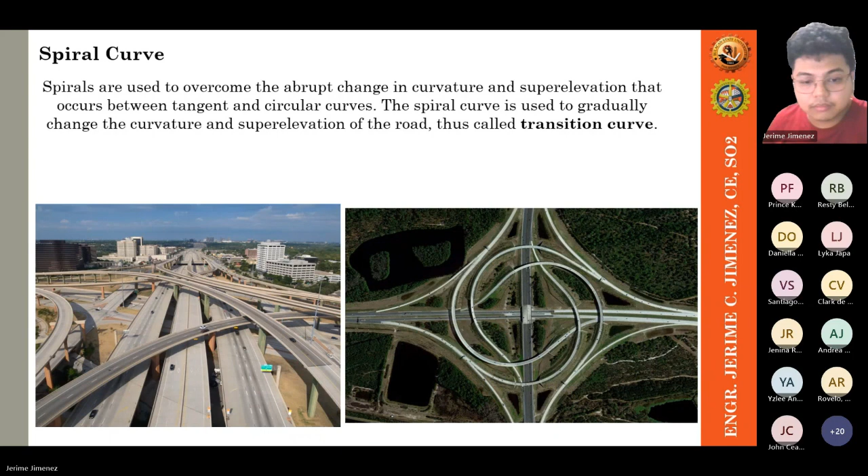Now, for the elements of the spiral curve. So how can we draw or how can we plot— sorry, hindi pala ito reverse curve, element of the spiral curve. So baguhin ko lang. Ayan, wait lang.

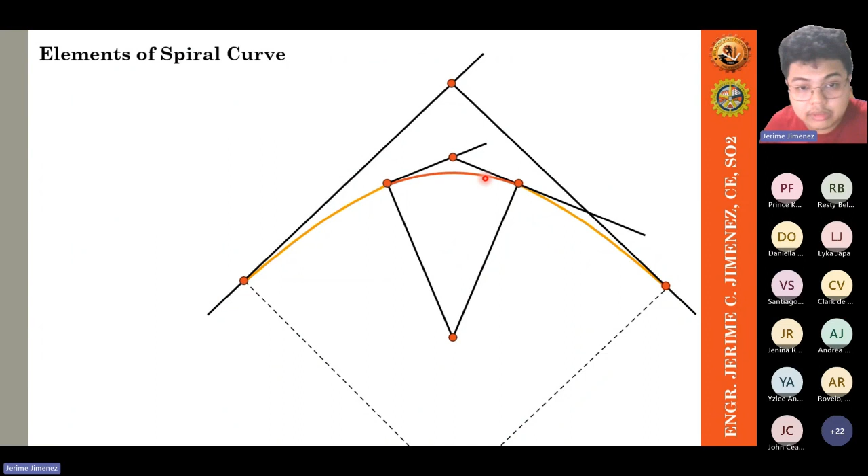So from the spiral curve, we transition to the simple curve. Then from the simple curve, we transition back to the spiral curve. This is now the exit of our highway. This is the start of our highway. I'll just offset this simple curve outward, then offset it also to the right. That will denote the external simple curve, or our external curve.

So this point here should be PC. But since we're dealing with a spiral curve, we call it TS. And this point, that will be our SC. This point is our CS, and this point is our ST. So this point is our point of intersection, or the vertex.

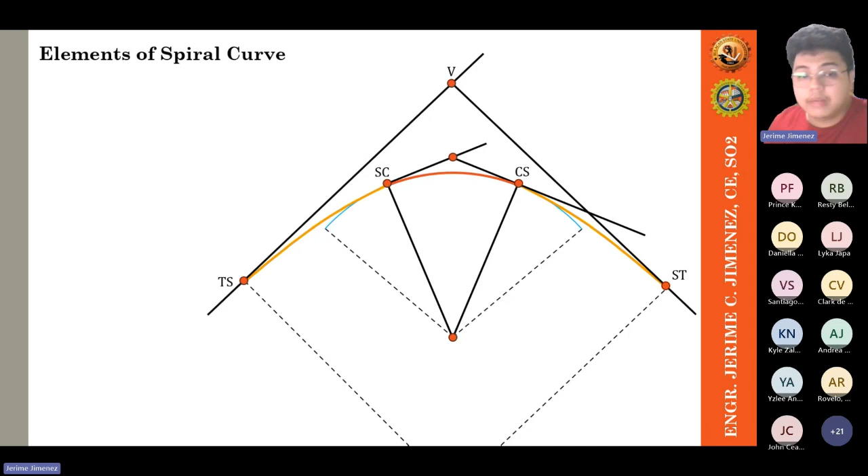So let's define each of these symbols. What is TS? TS is tangent to spiral. SC is spiral to curve. CS is curve to spiral, and ST is spiral to tangent.

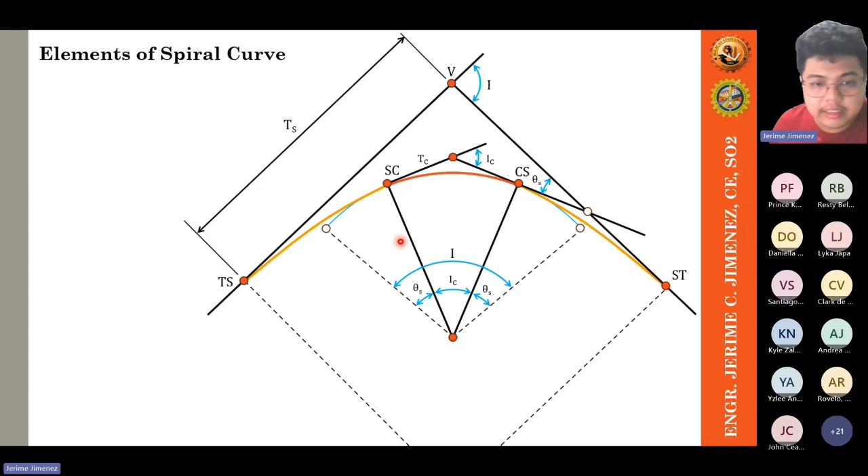So next element natin is, tingin kayo dito sa portion na to. That is our R sub C. And that R sub C is the radius of the simple curve. So that is from SC papunta sa center of the simple curve and from CS papunta sa center ng simple curvature.

Next. Tingin tayo sa portion na to. Ito, yung from CS to the vertex. That portion is our ST. ST denotes the short tangent. And this portion from this vertex, from this intersection papunta sa ST, yan naman yung ating long tangent.

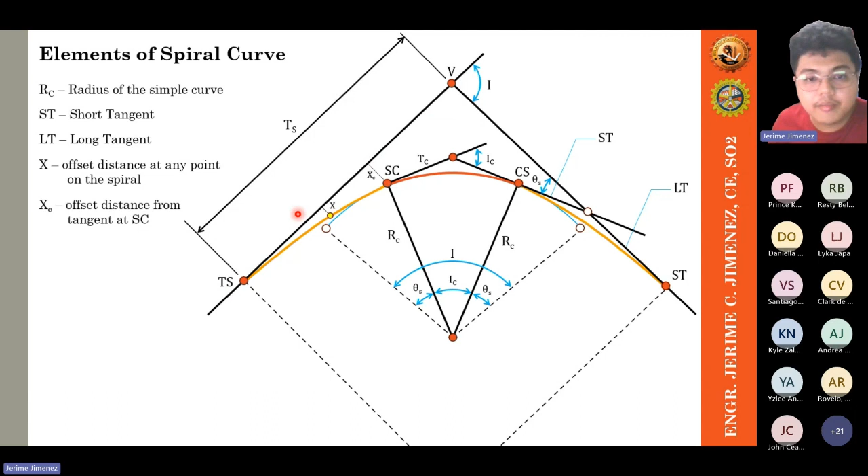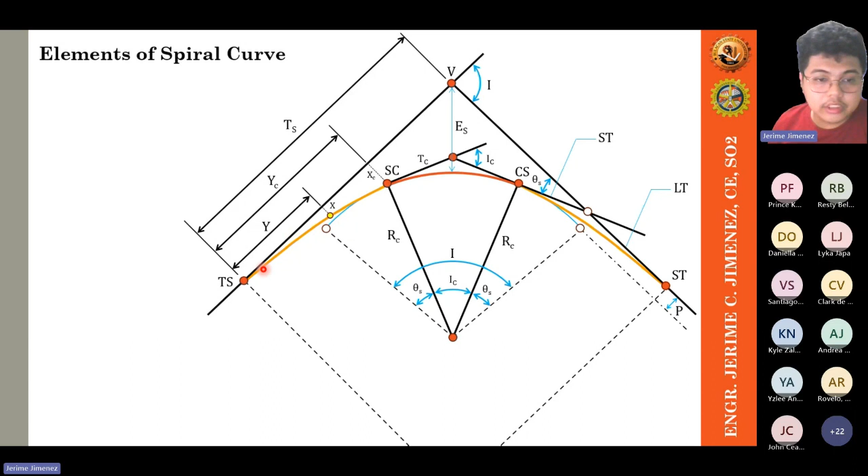So at any point along the spiral curve, may distance yan from TS, okay? Itong distance na yan, and that distance is denoted as L, okay? L. So L is length of spiral from TS to any point along the spiral. Okay, kung dito niyo naman siya kukunin sa kabila, that is length of spiral from ST to any point along the spiral. So this is from TS, okay? So nakita niyo wala siyang subscript. Pag wala pong subscript dito sa ating formula, it denotes that it is pertaining to any point along the spiral. Again, pag sub C, that is the curve or the simple curve. Pag sub S, that is the spiral curve. Pag wala naman siyang subscript, that denotes any point along the spiral curve. Okay? Next, yung distance naman from TS papunta dito sa SC, let's denote it as L sub S. And that L sub S is now the length of the spiral. Okay? Or L sub S.

Okay? So, tingin dito sa simple curve natin. Meron din po tayo dyan tinatawag na subtended angles. Considering the full station of 20 meters, yung subtended angle niya is denoted as D sub C. And that D sub C is degree of the simple curve. Paano siya kino-compute? Alam niyo na yun, simple curve, no?

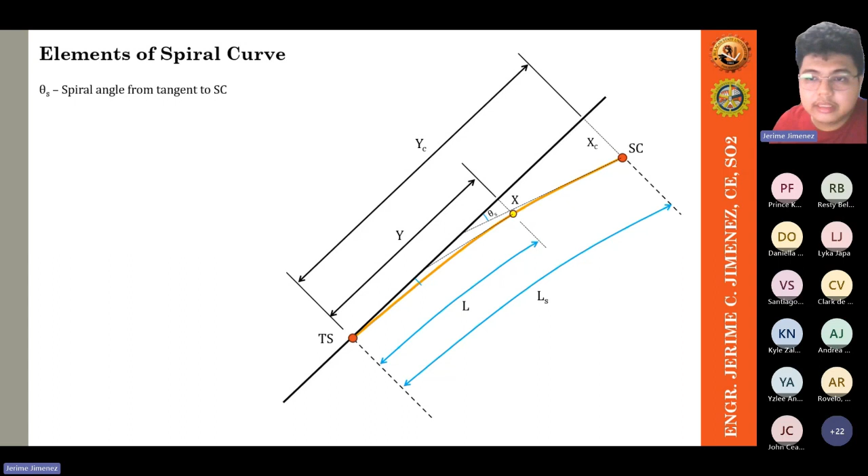At any point on the spiral curve, drawing naman ako ngayon dito ng tangent line. And this tangent line is what we called theta. Ito, theta po yan. And that theta is the spiral angle from tangent to any point on the spiral. So we have theta sub S and we have also theta.

Now, we connect TS to SC by a line. May angle din po yung tangent at saka yung connecting line natin from TS to SC. Ito yon. So what is that angle? Ano yung angle na yun? So, kung tangent line to, we have TS and SC. Kinonektan natin siya. Isipin nyo, PC to, ito ay PT. So therefore, what is this tangent? Anyone?

Parang gusto ko magtawag ah. O dahil nagre-review ka na kanina, sige Vanny, ano yung tawag sa angle na yan? Wala. Okay, mukhang sleeping sila ngayon.

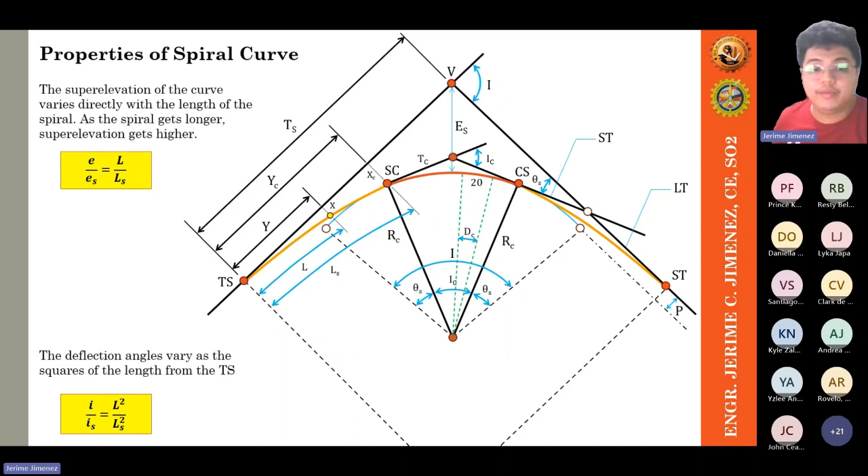So we have now the summary of formulas. So ang nilagay ko dito ay 16, I think this is 16 formulas. So I can derive this one. Pwede ko ipakita yung derivation nito. Pero I'll just post a supplementary video for the derivation of the formula. So ang gusto lang naman natin is yung final output or final formula na gagamitin natin sa ating problems.

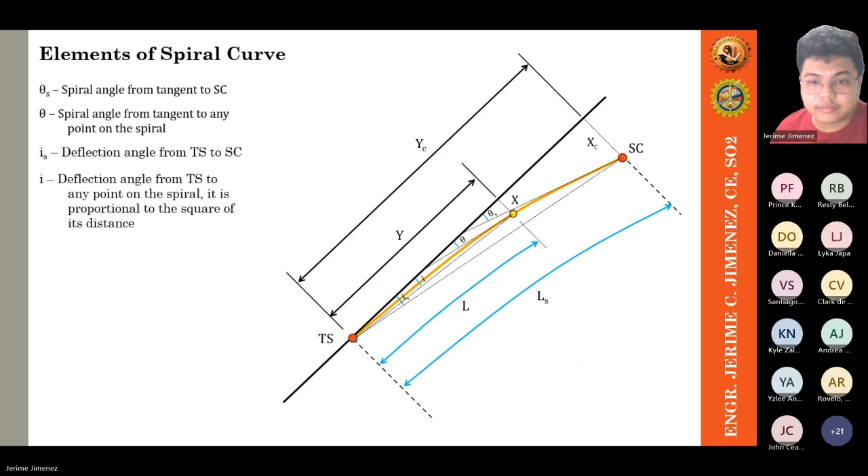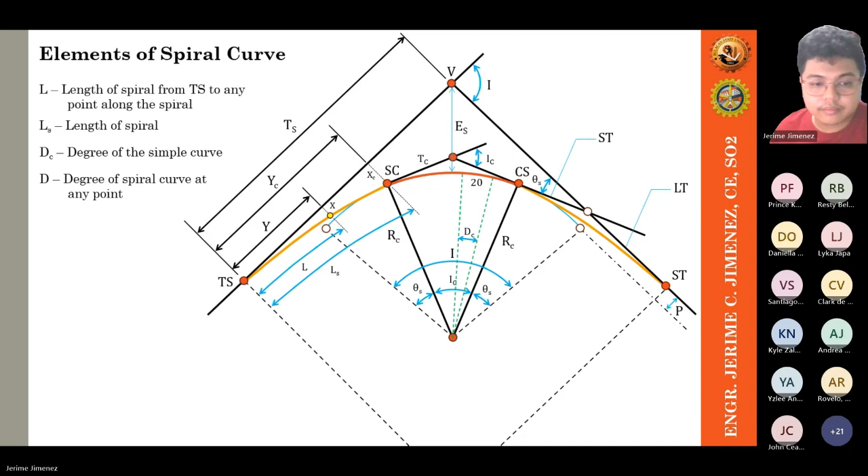Then we have also formula number 7, that is the distance along the tangent at SC from TS. Okay? So, y sub c, ito yung portion na yun, no? Wala pala dito. Dito. Y sub c natin na from TS papunta sa SC, no? Or from SC, galing ka ng TS. Okay? So, y sub c is equal to L sub s minus L sub s cube all over 40 multiplied by r sub c squared. Okay?

Okay, any question dito sa formula 1 to 7? Any question? And so far po. Okay, thank you.

Okay, formula number 8. So formula 8 is the deflection angle at any point on the spiral. So that is denoted as I. Okay, yung I natin, the deflection angle. I is equal to theta, or the angle at any point on the spiral, all over 3. Okay, that's only theta over 3. Theta over 3 lang siya.

Okay, pero we can also denote it as L squared all over 6 multiplied by R sub C multiplied by L sub S. So na-compute na ba natin dito yung theta? Ayan. So yung theta na to, yung spiral angle at any point, isa-substitute lang natin dito sa formula natin na I is equal to theta over 3. Okay? Kaya tayo magkakaroon ng formula na L squared all over 6 RC LS. Okay?

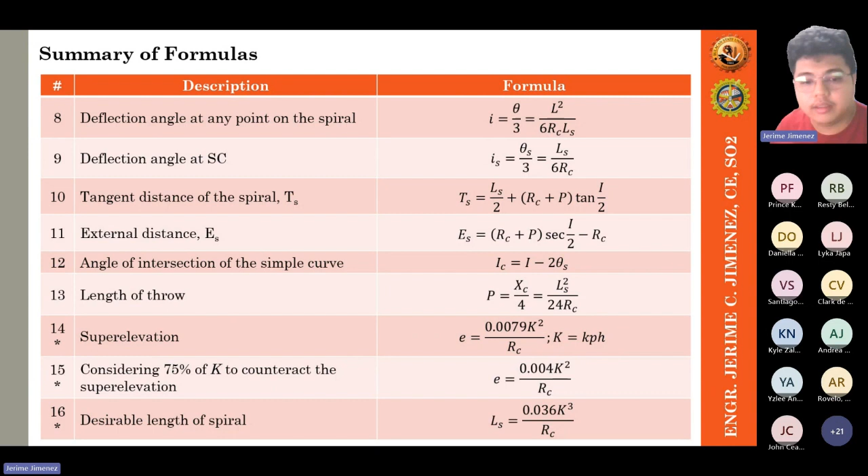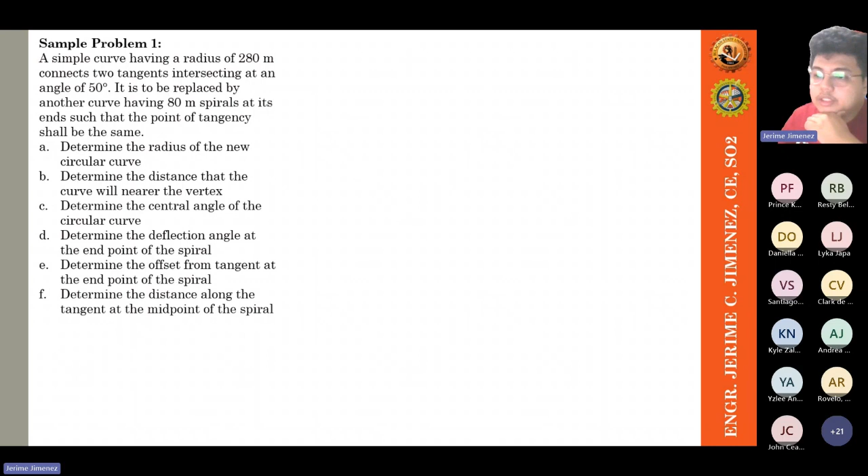Sample problem number 1: A simple curve having a radius of 280 meters connects two tangents intersecting at an angle of 50 degrees. It is to be replaced by another curve having 80 meter spirals at its ends such that the point of tangency shall be the same. Find the following: determine the radius of the new circular curve; determine the distance that the curve will be nearer the vertex; determine the central angle of the circular curve; determine the deflection angle at the end point of the spiral; determine the offset from tangent at the end point of the spiral; and determine the distance along the tangent at the midpoint of the spiral.

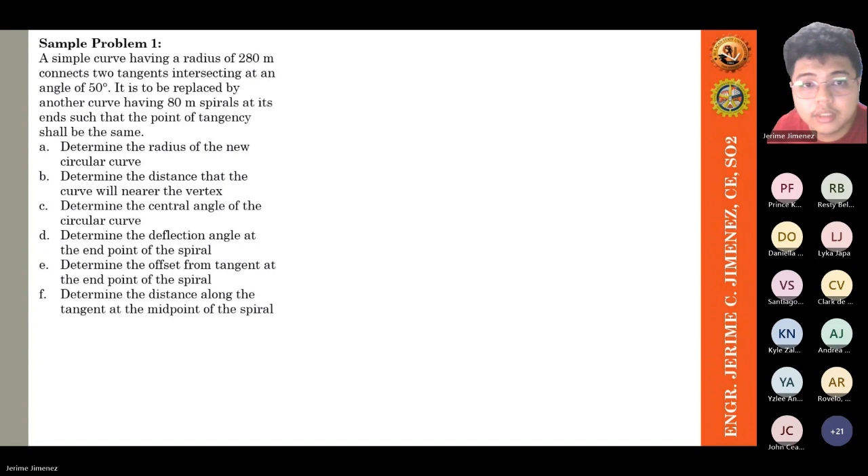So now we need to plot the problem. Sabi dito, simple curve daw siya nung umpisa, dinesign siya ng engineer na simple curve muna, having a radius of 280 meters. So kung dinesign siya as simple curve, ito ngayon yung magiging drawing natin, just a plain simple curve.

Having an intersection or angle of intersection of 50 degrees, yung I natin is 50 degrees. Ito yung radius natin na 280 meters. This is our PC, dito dadaan din sa sasakyan, papunta sa PT.

Pero ang problema dito sa ganitong simple curve, pag pumasok ang sasakyan dito at nag-bank siya, meron ka dyan tangent dito, nandito ngayon yung overshooting line. Papasok ka dito, ang mangyayari kung nag-drive kayo, kung sanay kayong mag-drive, ang tendency mo is to reduce your speed para makahabol ka sa curvature.

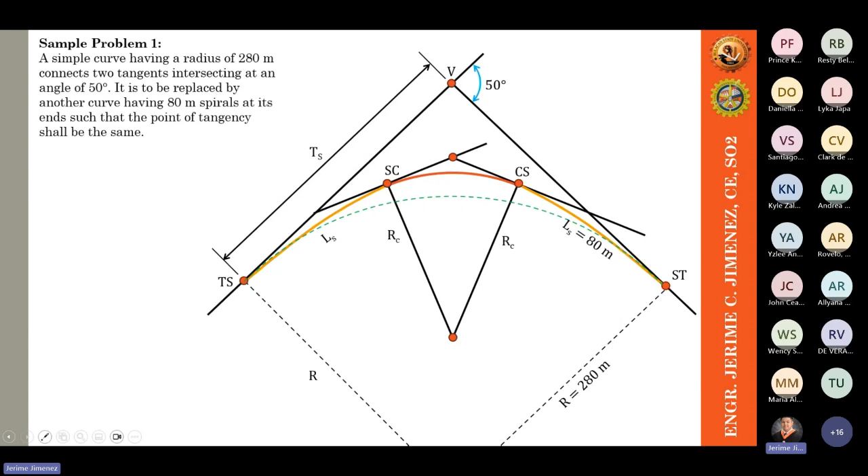So we need to determine the radius of the new circular curve. Pag hinanap sa iyo yung radius of the new circular curve, etong spiral curve yun, kasi ito lang naman yung circular. Yung spiral curve, hindi naman niya circular, spiral curve yan, or transition curve yan. Ang circular curve lang dyan sa'yo is itong nasa loob. Okay, so we have the formula for our radius r sub c.

But before that, kunin na muna natin si t sub s, kasi meron din tayong relationship in between t sub s and r sub c. So we have this formula of t sub s as L sub s all over 2 plus the quantity of RC plus P, or the length of throw, multiplied by tangent I over 2.

So hatiin ko muna sa gitna itong ating spiral curve. Since itong tangent line na to at itong radius na to ay perpendicular, at itong dividing line natin, since symmetrical naman sila, ay magiging hypotenuse natin. So magkakaroon tayo dito ngayon ng right triangle. So from TS to the vertex of our spiral curve, papunta sa center ng spiral curve natin.

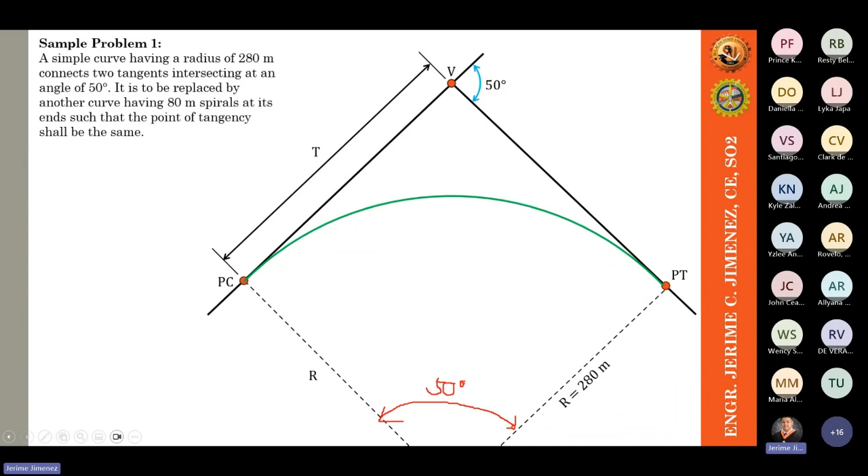So therefore, kung ita-transfer natin siya, hindi naman natin binago yung mismong elements natin. Hindi natin siya binago, hindi naman natin binuka ng sobra yung radius natin. So saan na tayo dito? Dito. So therefore, itong portion na to is also 50 degrees. Kung 50 degrees to, hati natin sa gitna symmetrically, so that is 25 degrees and 25 degrees din naman sa kabila.

So kung 25 degrees to, may angle na tayo ngayon dito, pwede na natin magamit ang tangent function. So we have tangent of 50 over 2 or tangent 25 degrees is equal to opposite all over the adjacent. Opposite is t sub s all over the radius, the old radius of the simple curve, which is 280 meters. So ang nawawala na lang is t sub s. We can now compute for t sub s as 130.5661 meters. So may t sub s na tayo.

Yung L sub s, given naman siya, that's 80 meters. R sub c, ito yung hinahanap. And then we can now have the I, the central angle of the angle of intersection of the spiral curve, and we have also P. So may formula tayo ngayon ng P. P is the length of the throw.

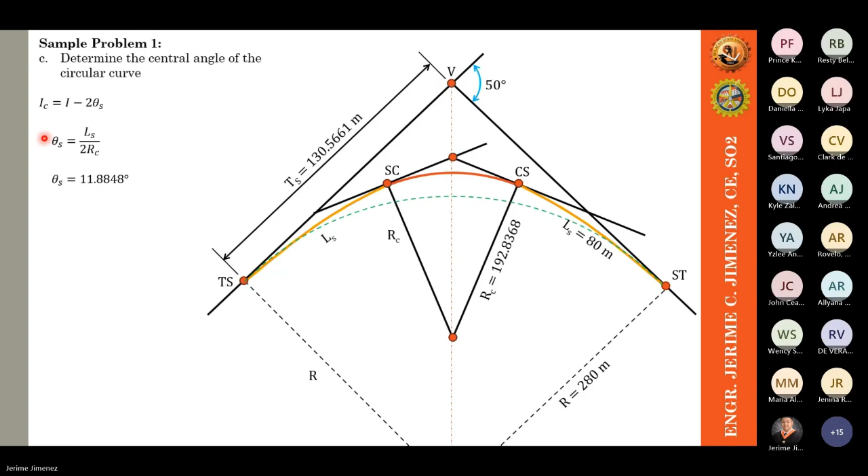So, para mas madali, open ko na yung calculator ko dito. Casio. Stop sharing lang ako. Saglit. Okay. So, tingin dito.

So, kung gagamitin natin yung formula na LS all over 2RC, ang LS natin is 80 all over 2 multiplied by RC, which is 192.8368. So that's equal to 0.207429 blah blah blah. That is in terms of radian. So we need to multiply this one by 180 over pi, para makuha natin yung in terms of degrees. So we have now 11.8848 degrees.

So may question ba doon? May question tayo doon? May question po doon? Wala po. Wala sir. Okay, thank you.

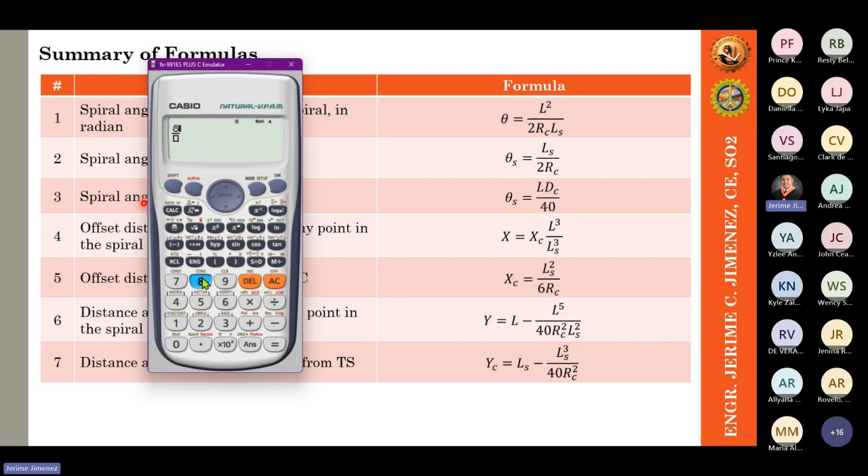Wait lang. Sige, i-check ko ha. In terms of radian, so 80 all over 2 multiplied by 192.8368. Okay, kailangan nyo talaga i-multiply siya sa 180. Kasi kapag in terms of radian, i-reset natin siya as radian, 80 all over 2 multiplied by 192.8368. Ganun ba rin yung lalabas? So, multiply nyo na lang siya sa 180 over pi. Okay?

Ma-analyze nyo naman kung paulit-ulit kayong magsosolve ng problem sa simple curve o any problems sa horizontal curves. Makikita nyo naman na kapag ang value natin ay sobrang liit, medyo magtaka ka na. Pag meron ka ng 0 sa whole number, 0 point something, medyo magtaka ka na. Baka kailangan mo i-radian. Ngayon, mag-unit analysis ka. So, paano ba mag-unit analysis? So, this is applicable. Question lang pala.

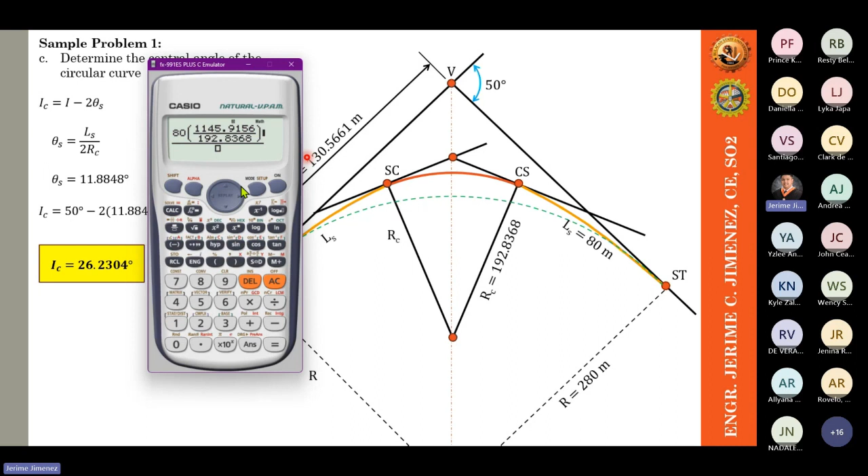So that is 192.8368. Okay? So ang formula ulit natin, theta S is equal to L DC all over 40. So makukuha na natin in terms of angle yung ating theta S. Okay? So, pwede nyo rin gamitin yung formula number 3. Kapag nakuha nyo na si R sub C, pwede kayong gumamit ng arc basis. Okay?

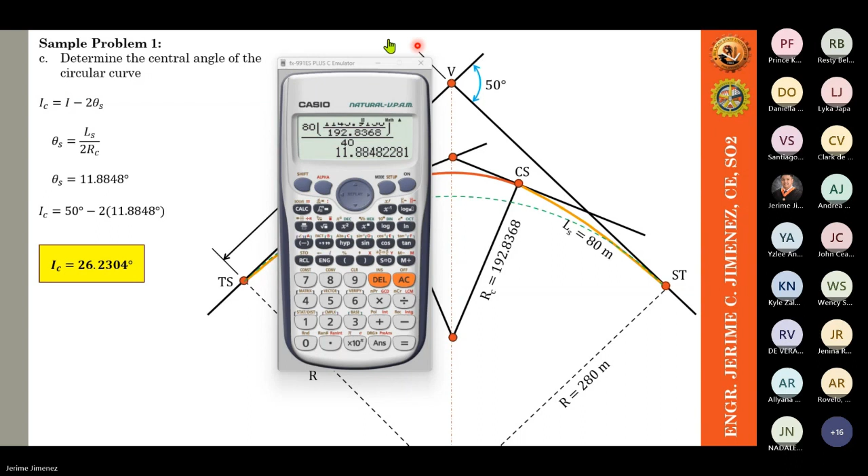Okay, so that's it for problem C. Next, we have problem D. Okay, so you need to determine the deflection angle at the end point of the spiral. So, at the end point of the spiral, okay? So ang hinahanap sa atin dyan ngayon is I sub S. Okay? So that is the deflection angle at the endpoint of the spiral.

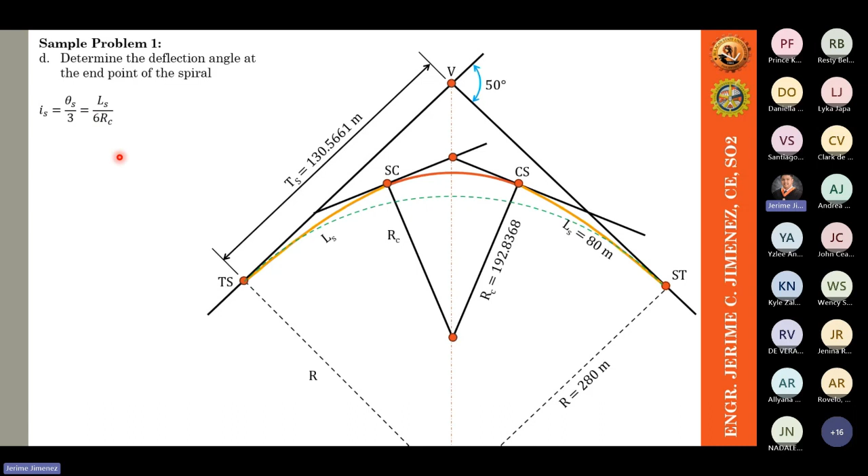So our formula is I sub S is equal to theta sub S all over 3, which is also equal to L sub S all over 6RC. Okay? So given naman tayo ng theta S, pwede nyo gamitin to formula na to kasi given naman si L sub S and na-compute na si RC. Okay? Pero dito na ako sa theta S, no?

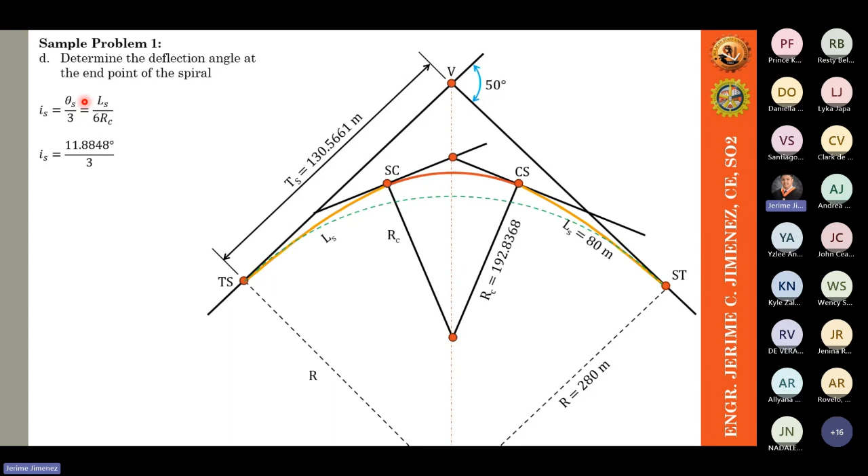So, substituting the computed theta S, we have 11.8848 degrees all over 3. So therefore, the deflection angle at the endpoint of the spiral is 3.9616 degrees. Okay?

So pag ginamit naman natin itong LS all over 6RC, so 80 all over 6 multiplied by 192.8368, computing, multiply natin siya sa 180 over pi. Okay, wag kakalimutan yan na 180 over pi. Bakit? Okay, so ipakita ko sa inyo. So that is 80 all over 6 multiplied by 192.8368 meters. So magiging sagot niya is 0.06914. So that is in terms of radian. So bakit siya in terms of radian?

Okay? Unit analysis. Ay, question lang. Nakikita ba tong calculator ko na to? Yes po, sir. Okay, kita naman, no?

So, in terms of radian, yung makukuha nating value kapag ginamit natin si LS all over 6RC. Unit analysis. LS is in terms of meters. RC is in terms of meters. So, meter all over meter will be cancelled. Magiging unitless siya or in radians. So we need now to multiply this one by 180 over pi.

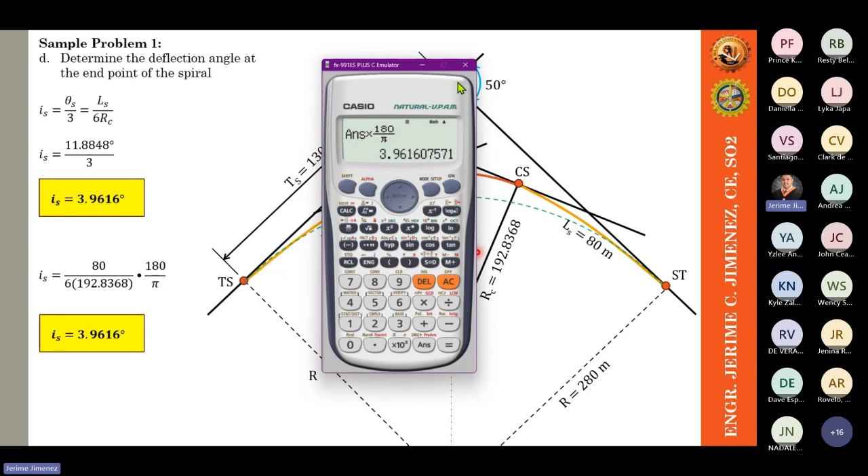Next, letter E. Determine the offset from tangent at the endpoint of the spiral. So, ang hinahanap sa atin dito is x sub c. Okay, x sub c has the formula of LS squared all over 6RC. So, given naman si LS, given naman si RC na. So, we have 80 squared all over 6 multiplied by 192.8368. X sub c is equal to 5.5314 meters. Okay, formula base lang naman to.

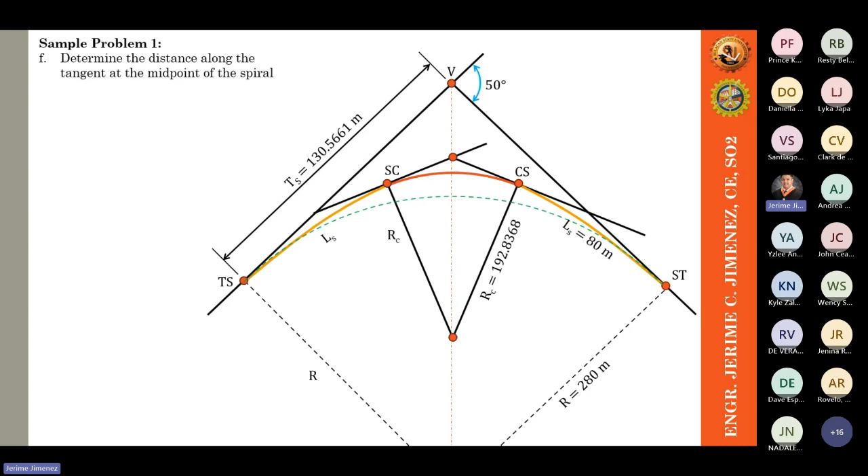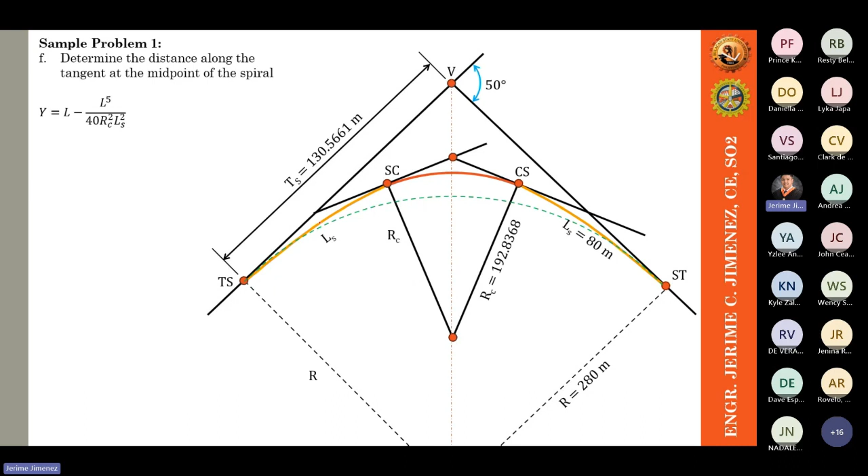Then lastly, we have F. We determine the distance along the tangent at the midpoint of the spiral. Okay, midpoint of the spiral. Okay, so ang hinahanap sa atin dyan ay Y. Bakit siya Y lang? Bakit hindi siya Y sub C? Okay, ang hinahanap po sa atin is distance along the tangent at the midpoint. Ibig sabihin, nandito daw tayo sa midpoint ng ating spiral. Somewhere here. Ayun.

Okay, somewhere here ang ating kino-consider na point. So ibig sabihin, ang kailangan natin ditong formula is the formula at any point on the spiral. Okay, so this is the distance of the tangent at any point on the spiral. Kaya siya hindi y sub c. Kaya y lang yung pinoconsider natin na variable. So y is equal to L minus L raised to 5 all over 40 RC squared LS squared. May RC tayo, may LS tayo, pero wala tayong L.

Pero sa problem natin, sinabi naman na yung ino-consider daw natin na point is at the midpoint of the spiral. Sa gitna. So therefore, L is equal to LS over 2. Kung LS over 2 siya, 80 over 2, which is also L is equal to 40 meters. Ibig sabihin, nasa 40 meters siya from the TS. Okay, so now, we can now substitute the value of L. Kompleto naman na yung mga variables natin. We can now solve for the value of Y.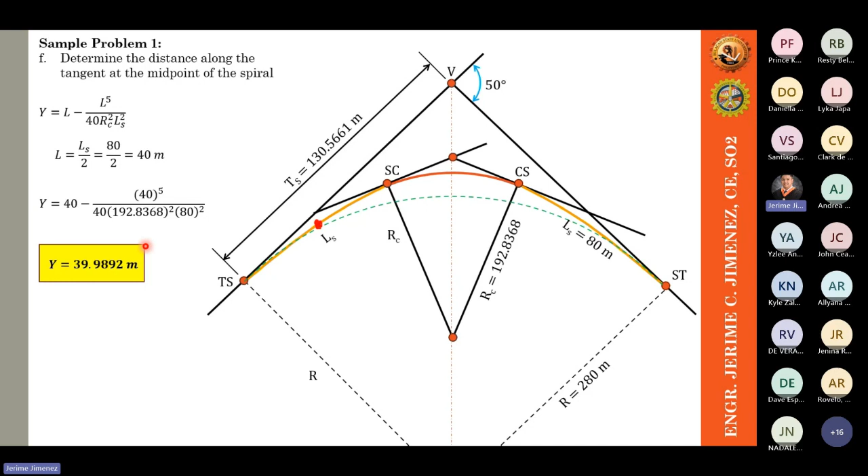Y is equal to 40 minus 40 raised to 5 all over 40 multiplied by 192.8368 squared multiplied by 80 squared. Okay. Take note, LS squared pa din siya. Okay. So calculating the value of Y, Y now is equal to 39.9892 meters. Okay. Any question?